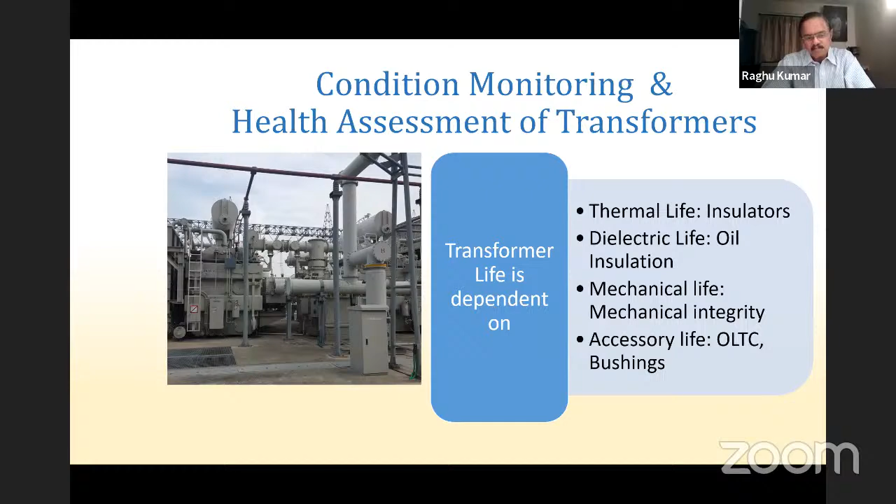This transformer is a failed transformer, and nobody wants to see a transformer in this condition. The windings are being lifted up to understand what went wrong. So now the question is, why is condition monitoring required? Condition monitoring is carried out to prevent failure of critical transformers. And the maintenance has to be made cost effective. You cannot have a very expensive maintenance procedure, so cost effective maintenance is what is required.

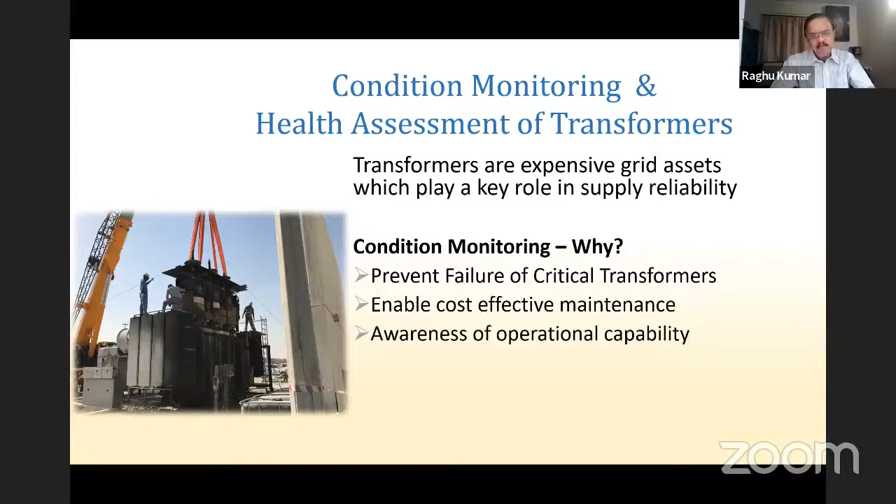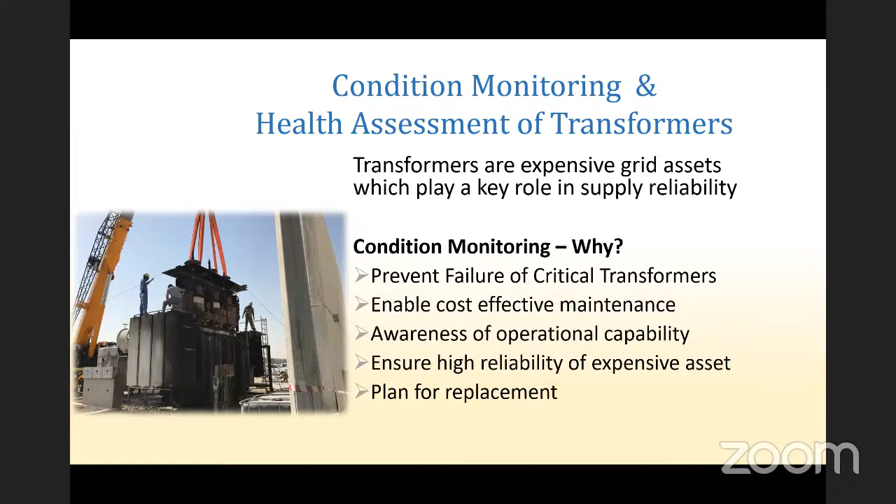Then, awareness of the operational capability. Once you have the complete information of the system, decisions on operation, how much it can be loaded, whether it can be overloaded, can be taken if the present status is well known. Then reliability of an expensive asset is assured by going through condition monitoring. And in the long run, you get enough time to plan for replacement.

Now the question arises, which transformers to monitor? See, Qatar may be having about 900 plus transformers in the system, and it's impossible to monitor. I'm talking about only the transmission side. In the distribution, there are 20,000 plus transformers. In the transmission, we cannot afford to monitor all the 900 transformers.

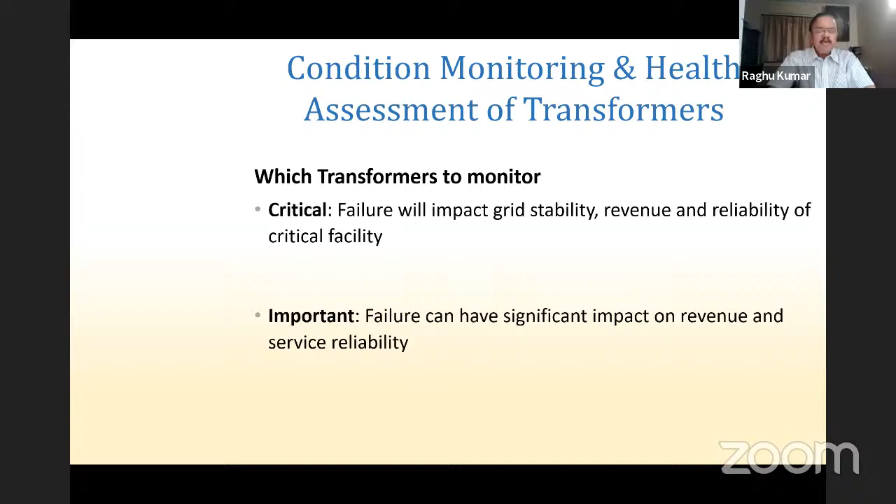So what we are doing is, we are dividing the transformers into 3 different categories. The one is the critical transformers. The failure of the critical transformers can impact grid stability, and it will be a major revenue loss in case of a failure. The second set is important transformers. The failure can have significant impact on the revenue. Normally, these interbus transformers come into this class. Next is the unimportant transformers. The failures are low impact.

So what we were doing is, all transformers which were above 100 MVA were being continuously monitored. And below 100 MVA, transformers were partially monitored. And there are certain below 100 MVA which are fully monitored. Those transformers were the ones which are underground. We had about 12 to 13 underground substations. And all the underground substations are very critical because any fire inside is dangerous. So underground substations are continuously monitored, even if the transformer size is small.

And the smaller transformers are rarely monitored continuously. Only offline condition assessments are being carried out on the smaller ones. To understand things easily, a transformer's life testing can be compared to a person's testing. See, we can do our medical test by taking a blood sample. For the transformer, instead of the blood, the oil sample is taken. The blood sample gives you a general idea about your health conditions. Similarly, a transformer's life can be understood from the analysis of the oil.

Once the oil results are out, the physician diagnoses what is your problem and gives you a certain regimen. A similar role is played by the transformer engineer who does the initial diagnosis, and when the condition is more serious, it is referred to a specialist. Like in your case, from a physician, you move to a specialist. Like that, we move to a transformer expert for advanced diagnosis who confirms the maintenance need. It's like a second opinion.

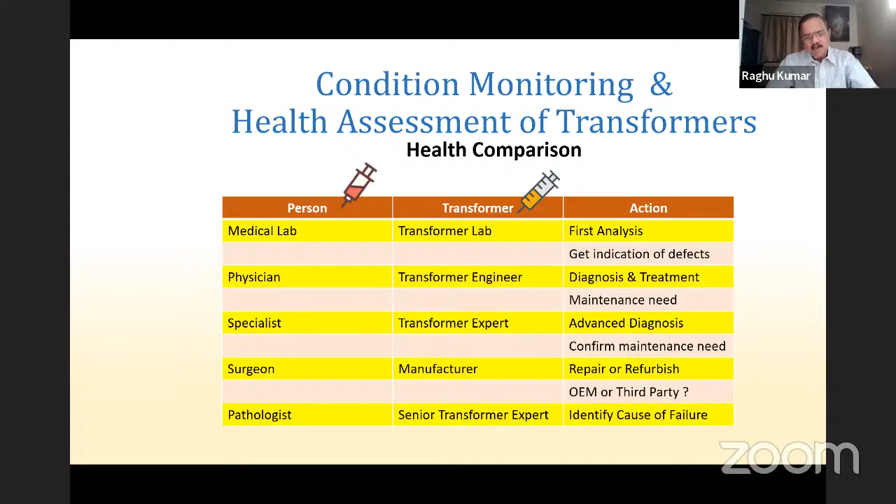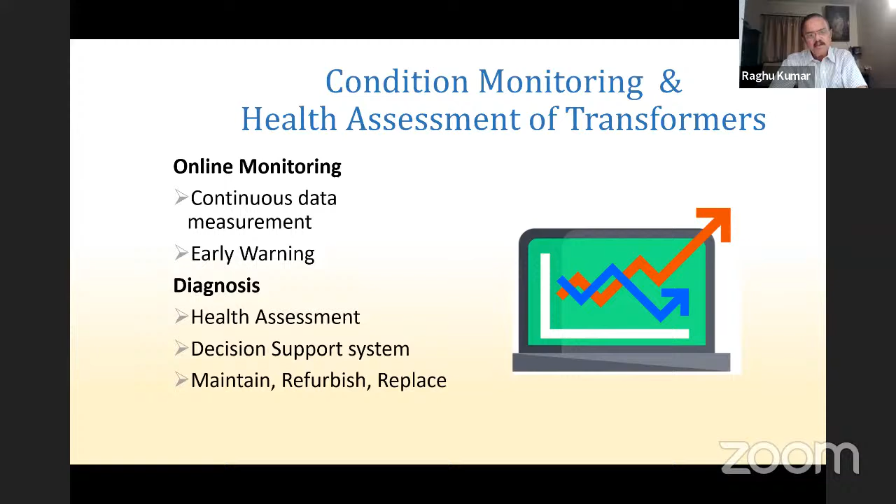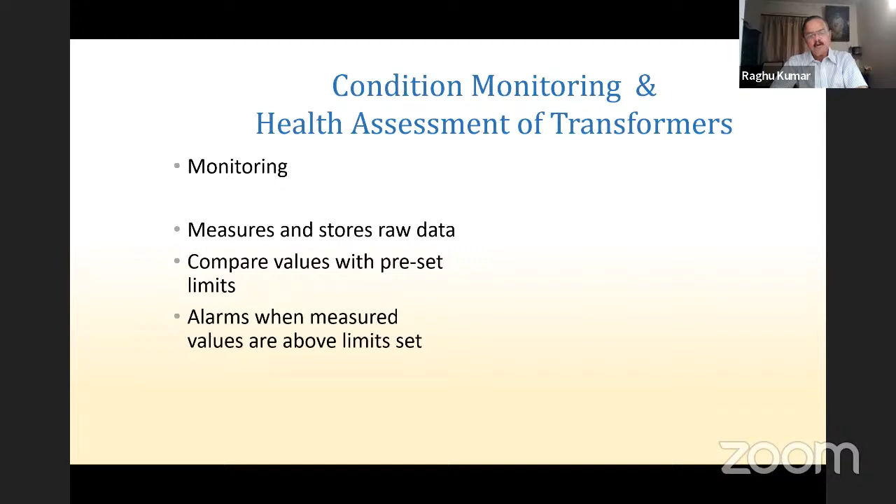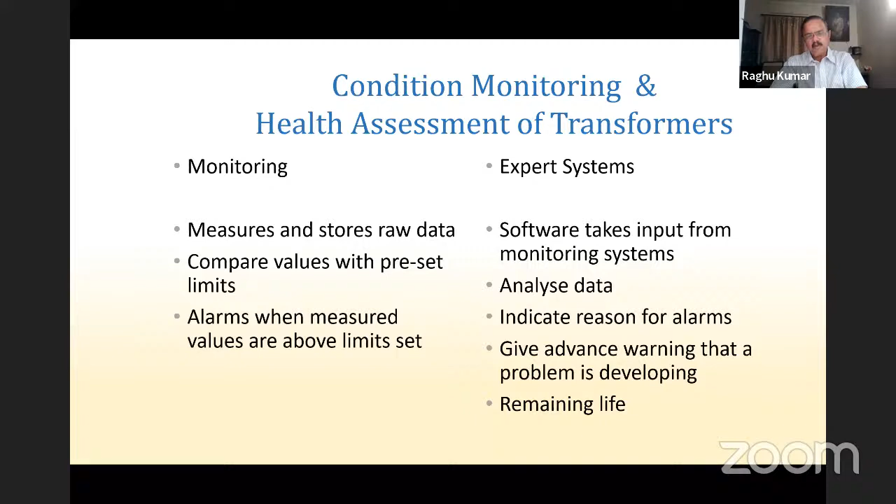So online monitoring is a continuous data measurement. It gives you an early warning system. And diagnosis is the health assessment. It's a decision support system which helps you make maintain, refurbish, or replace decisions. Monitoring basically measures and stores raw data, compares the values with preset limits, and alarms when measured values are above a set limit. In expert systems, software takes the input from the monitoring systems, analyzes this data, indicates reasons for the alarm, gives advance warning that a problem is developing, and the remaining life of the transformer is calculated.

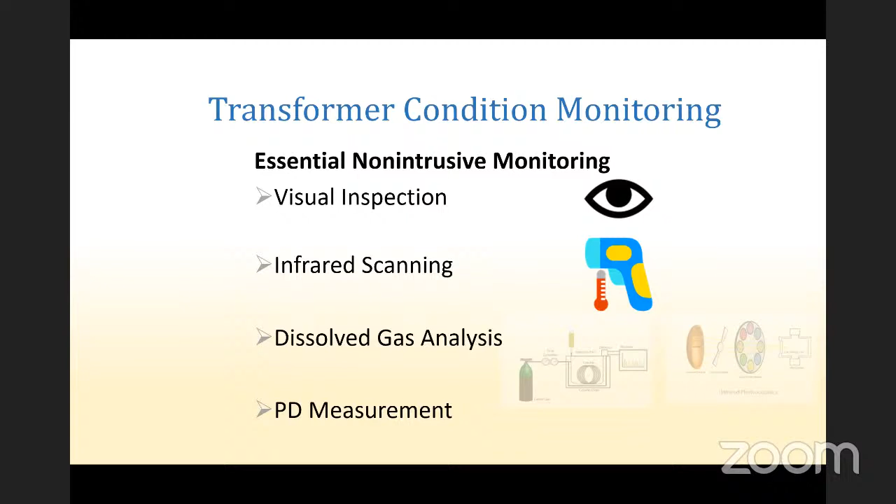What kind of monitoring can we do? Most of the monitoring is non-intrusive while the transformer is still running. The first one is a visual inspection. And the next stage, we go in for an infrared scanning. And the last stage is dissolved gas analysis. And normally, a PD measurement is carried out in certain very important transformers. Visual inspections can find out defects like oil leaks, bird nests, marshalling kiosks, loose connections, etc.

There was one case in Qatar where a visual inspection for oil leaks saved a bushing. It was a 315 MVA transformer, and during the visual inspection, it was noticed that oil was coming out of a bushing's test tap, and the leak was a bit serious. Immediate action was taken, further inspection was carried out, and it was found that the bushing was defective and needed to be replaced.

And this bushing was not an external bushing. This bushing was going inside a GIS. So a failure could have damaged not only the bushing, even the GIS compartment could have been damaged, and it would have been a major disaster, and it would have taken more than a year to repair and replace. Just because the visual inspection identified the problem, immediate action could be taken. The bushing was replaced, and the transformer was brought back into service.

Next is this, which looks like a minor issue, like a bird nest. No, it's not a minor issue. See what happens with open bushing transformers. This bird nest comes up, and then the bird is not the problem. There are cats coming looking for these birds. The cats jump over the transformer and cause a direct short circuit. And this has also caused tripping of the transformers.

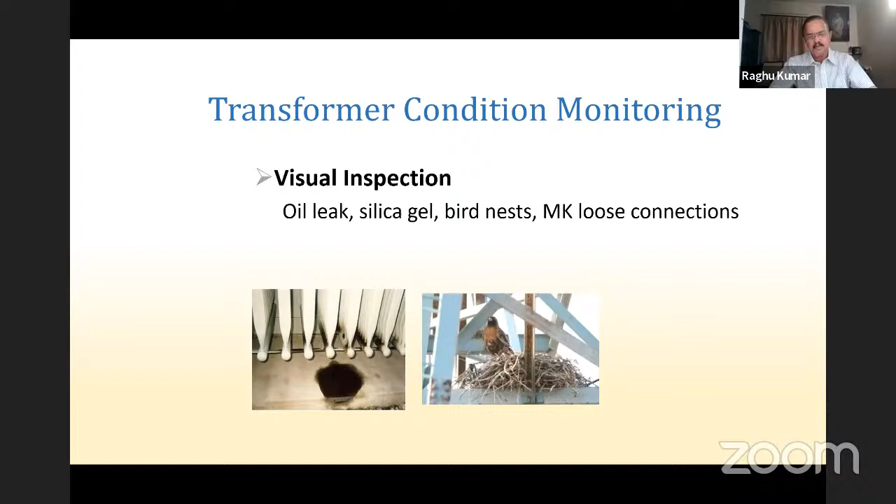Next comes infrared scanning. In infrared scanning, thermal images are taken using an infrared camera. This is normally done during peak load times. Normally in the Middle East, summer is the peak load.

This identifies cooler defects. It has been detected after years that certain coolers were not opened, which affects the cooling efficiency. This can be detected only in thermal imaging. And certain other hotspot issues also can be identified with this infrared scan.

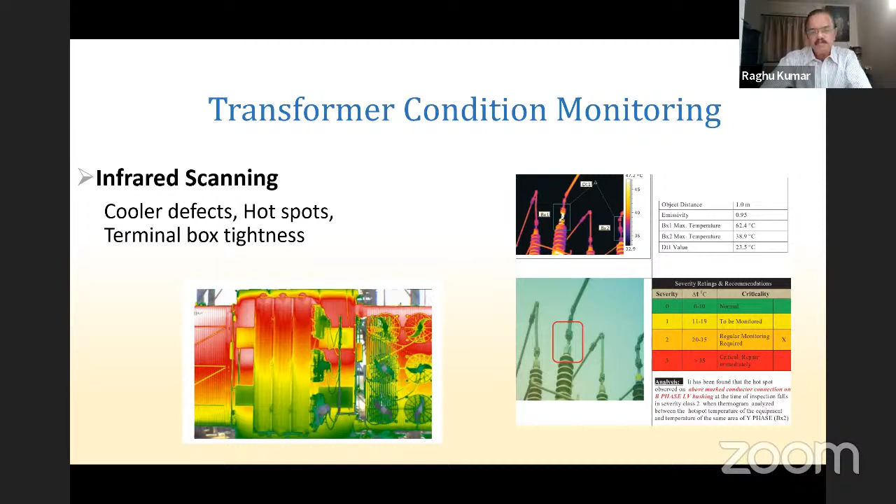If it is between 20 to 35 degrees, then the monitoring frequency is increased. If it is greater than 35 degrees, immediate action is required, and shutdown is arranged and checked. Most of the times, it has been found that a loose connection was the reason for the overheating. So these are the infrared scanning cases.

Next comes online monitoring. This is an 800 MVA transformer where you can physically see certain things. This is the online monitoring device, and this is a monitoring system where all the data from all other sources comes for monitoring. This information is taken inside the control room to an HMI, and that HMI has got the software for all the analysis purposes.

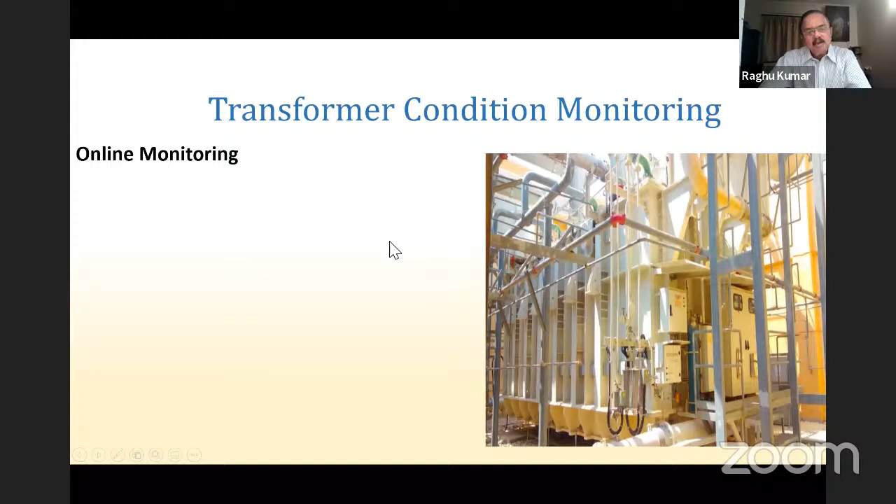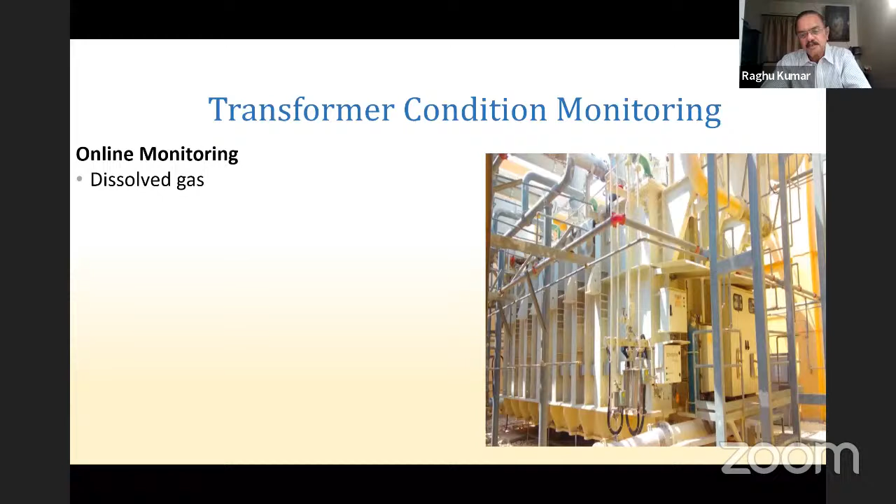What is being monitored is dissolved gases. There is a decision you have to take whether you want to monitor 1 gas, 3 gas, 5 gas, or 9 gases. In this particular transformer, 9 gases are monitored. Humidity of oil, oil temperature, current and voltage are recorded. Bushing tap PDs are measured continuously. Tap changer positions are recorded.

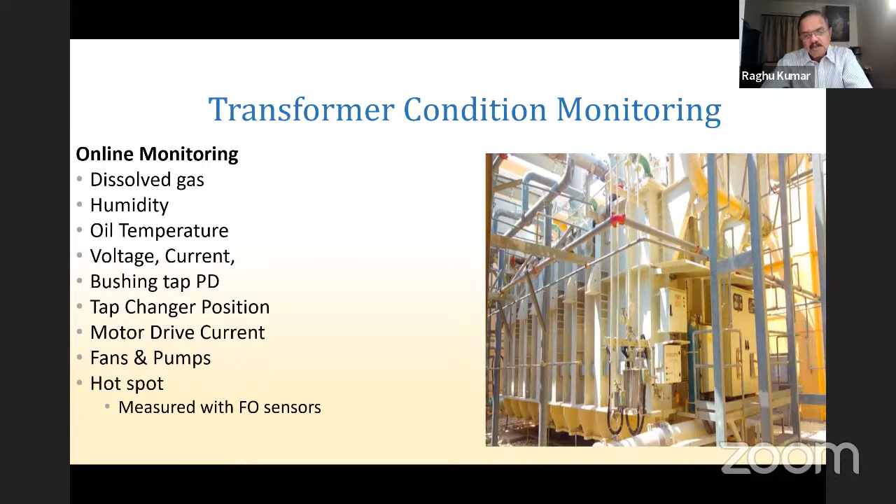Tap changer motor drive currents are recorded. Fans and pump status are recorded. And hotspots: there are two ways of finding out the hotspot. One is theoretical calculation. Second is physical sensors kept inside the transformer. Fiber optic sensors are kept inside the transformers. From this, direct hotspot temperatures are measured. So these are the basic online monitoring systems.

These are some of the equipment used for online monitoring. This Kelman Transfix works on the photoacoustic principle. And Serveron works on gas chromatography. Gas chromatography has a maintenance issue in the sense that it needs a carrier gas. Helium is the carrier gas here, and this helium needs to be replaced every 2 to 3 years. And once you replace it, calibration is required.

This equipment does not require any calibration. It works on a photoacoustic analyzer, and there is no carrier gas involved. Both of these can check 9 gases. In smaller transformers, we fix these hydrogen sensors. This can monitor only hydrogen and moisture. Most of the faults have hydrogen in them.

And this is how the oil is taken into the analyzer. See, from the top valve, oil is taken and then it comes into the analyzer. Once this process is over, it is pumped back to the bottom valve. So no oil is lost during the analysis process.

The fault intensity is dependent on the total amount of combustible gases. Moreover, this process is a trending analysis: over a period of time, what is the rate of change of gases?

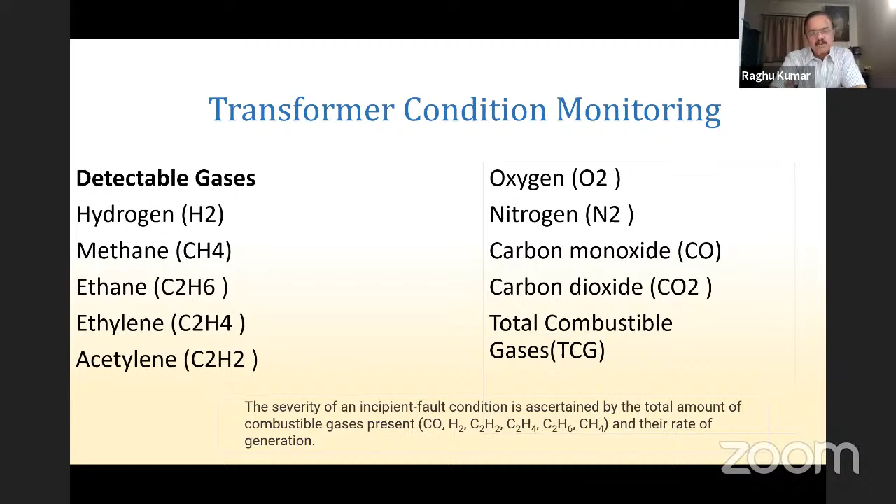This is a practical example of monitoring success. This was a 150 MVA transformer, and it was giving Buchholz alarms. The gas was not sufficient to trip, but it was creating Buchholz alarms. If you reduced the load, the alarm disappeared. This was a very important transformer and we couldn't switch it off immediately.

So continuous monitoring of the gases was done for a period of 1 week. This particular transformer did not have condition monitoring at that point of time, and physical oil samples were taken and checked every day. At different loads, the load was reduced and increased and checked. And finally, we arrived at a conclusion.

See, if you look at this, this is the most important gas, which was above the warning limits. This is ethylene. Ethylene is normally present when there is a high temperature fault, like faults above 700 degrees.

Later on, over a period of time, it was assessed and found out that at 60 MVA the transformer can be safely operated. And we kept that load at 60 MVA, and the transformer was operated until an expert arrived from the manufacturer. And then an internal inspection was carried out. Those days, internal inspection means you have to remove oil completely. Then one person goes inside the transformer, physically checks, comes out, and then finds a solution.

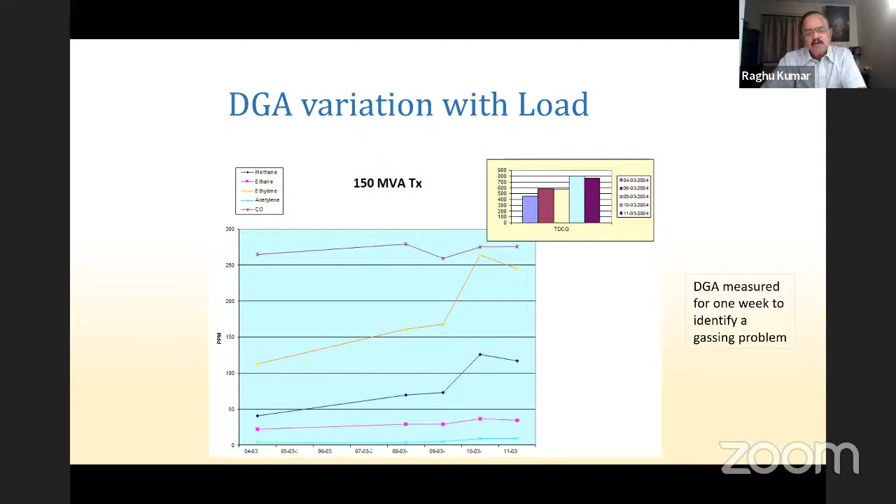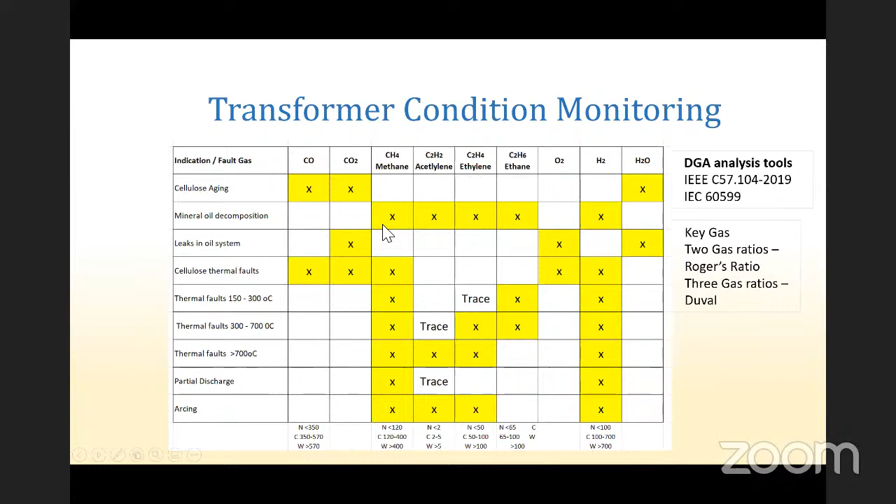And DGA gives out different gases. And it is very difficult to say what the fault is just from the gases only. If you look here, you can see hydrogen is present in most of the faults. And similarly, methane is also present everywhere. So the answer to what the fault is, you have to get it from an expert. And there are certain softwares which can give you the results.

And there are certain normal values given in IEEE standards, where, for example, if you take hydrogen, 100 ppm is a normal value, 100 to 700 range is a caution value, and above 700 is warning. But IEEE is very, very conservative. So this 100 is not always very practical. It is load dependent. In summer, the hydrogen level increases, in winter it comes down. So we used to keep up to 200, 250 as normal, and then in winter it will definitely come down.

And how to find out what the fault is? IEEE and IEC have relevant standards, which give you some kind of tools to find it out. There are three methods basically used. One is called the key gas method, where only a single gas concentration is considered for fault finding. Like in the previous case which I showed you, ethylene. Ethylene concentration shows that it is going to be a high temperature fault. Acetylene shows it is an arcing fault. Things like that are identified from a key gas.

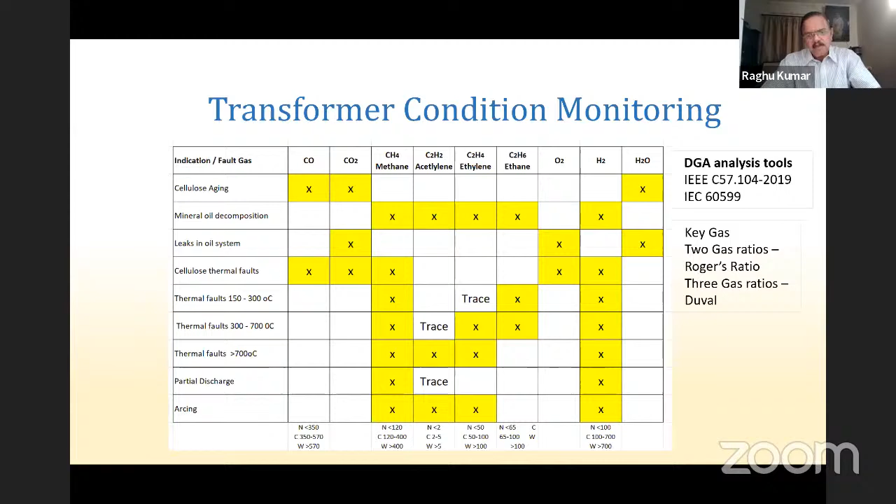Then there is another one called a two gas ratio, which is called the Rogers ratio method. The third method, which is most popular, is a three gas ratio method called the Duval triangle. This is the Duval triangle, and this is the person who developed this system. He is Dr. Michel Duval. He was working for Hydro-Quebec, and he travels around the world and trains people. We all received our initial training from him. He used to come and explain things, and he is an expert in the oil system.

In the Duval triangle, he has given a triangle with three gases: methane, ethylene, and acetylene. Percentages are calculated on a three coordinate basis, and where the three coordinates meet at some point in this triangle, that is the fault. These faults are given D1, D2, DT, T3; all these things are explained here. So suppose it meets at D2, it means it's a high energy discharge. And if it is meeting at this point, it's a partial discharge, like that.

There is one disadvantage for this method. You have to be initially sure there is a fault present. Otherwise, the Duval triangle does not have a location which says no fault. Every point in this triangle is a fault. So you have to be initially sure that there is a fault present to use the Duval triangle.

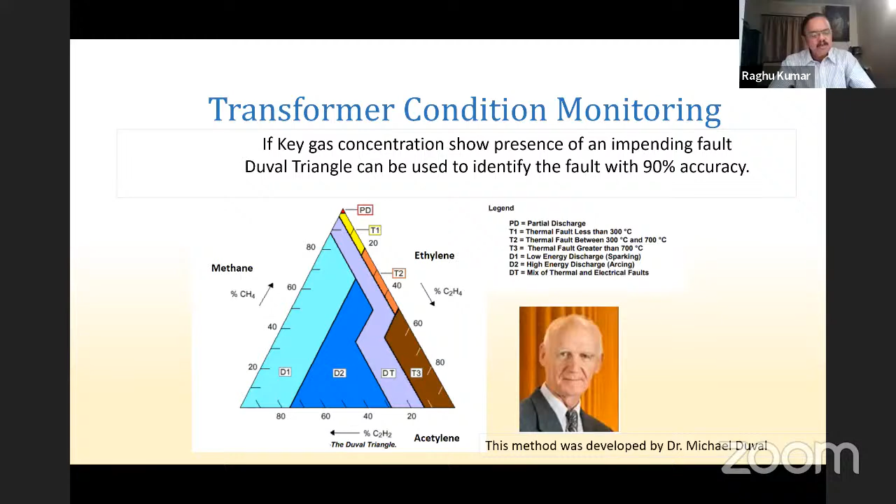Next, we do some kind of offline monitoring. Offline analysis is required to find out physical conditions of the oil, like acidity, moisture, interfacial tension, breakdown voltage, inhibitor content, oxidation stability, corrosive sulfur, degree of polymerization, furfural, PCB, etc. Each is a huge subject. Like corrosive sulfur is a big issue.

It was created by a substance called DBDS in the late 90s, early 2000s, when the transformer requirement was very high, and the oil was passivated with DBDS, which started giving problems of copper sulfide formation. And there were sudden transformer failures. On investigation, it was found that DBDS was the culprit. Nowadays, each transformer oil is tested to avoid this corrosive sulfur. Then color, viscosity, flash point, etc. And DGA is again rechecked offline to confirm the online measurement is correct.

See, color is something which you can easily identify with. See, these are samples of oil with different colors from good to bad. The good oil will look like that, and the worst oil is looking like this. Why this oil color changes is due to sludge formation. And once the sludge is there, the cooling efficiency is reduced drastically.

How do you reclaim the oil? The oil can be filtered, yes. Filtering can remove the gases in that, and the moisture can be removed. IFT can be improved, BDV can be improved, but it cannot change the color and it cannot change the acidity. These two cannot be reversed by oil filtering. So what is the solution? There are two solutions. One is you replace the oil completely. The second is called oil regeneration.

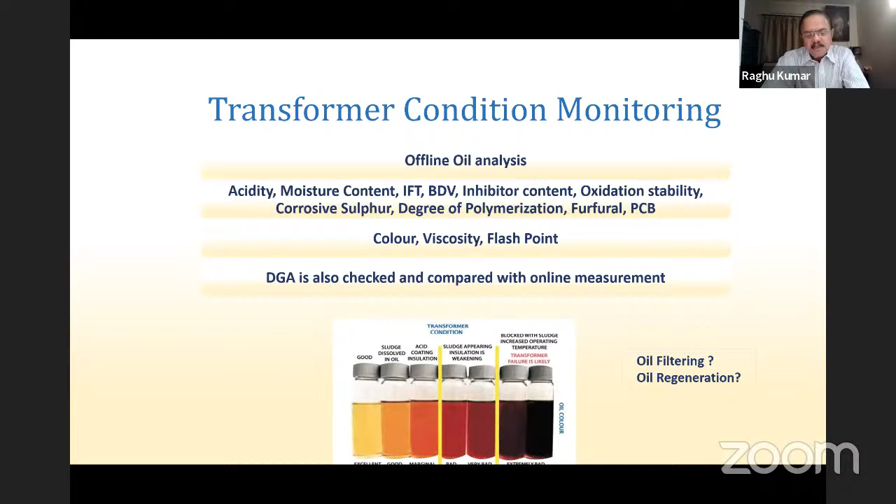This is an example of an oil regeneration. Oil regeneration can be achieved at almost half the cost of a new oil. The equipment comes in a container, and this container has got two compartments. One compartment is where the oil reclamation process takes place, and the second one is a laboratory setup where the oil can be continuously tested. This is a two-part process. One is oil filtering, and the second is it is passed through columns of fuller's earth. And this is what is removing the acidity, sludge, and stuff like that.

These are the set of oil samples which have been taken during the process. You can see the change in colors. This was the initial oil color, and this is the final oil color. The advantage of this one is the whole process is carried out while the transformer is live. We switch it off only one time for connecting the hoses and the second time for removing the hoses. And the oil circulation is going on continuously on a live transformer. And there are certain equipments which are connected to the inlet and outlet to avoid entry of air into the transformer.

And this is fast also. These are huge machines with a capacity of over 5,000 liters per hour. And on a small transformer, hardly 20,000 liters of oil will be there. Within one day, the process will be over. The same oil, if you want to totally replace, it's a one-week job. And it's not a question of job alone. This oil which is removed, disposal is a big issue because of environmental factors. Oil regeneration avoids all this.

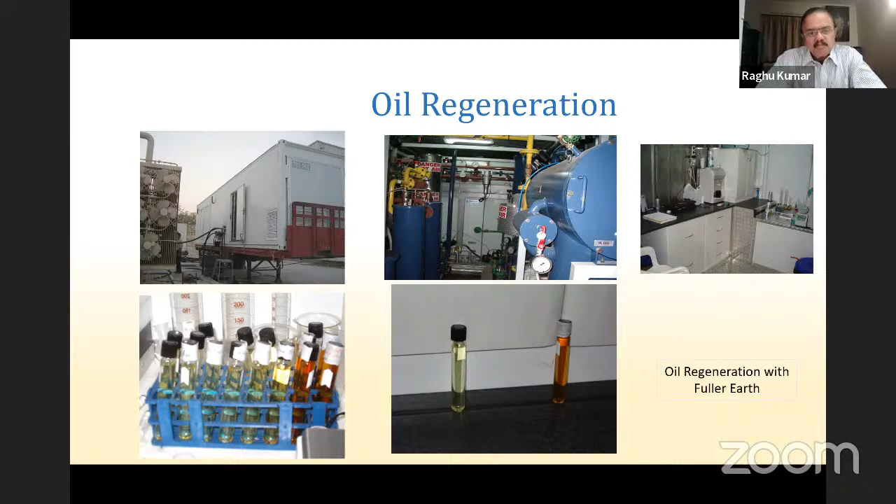This is an interesting part. The internal inspection. See, suppose you have identified a fault in the condition monitoring, and you know it is inside the transformer. How do you solve the problem? Normally the OEM has to solve the issue, but the problem is we don't know exactly what the problem is internally. The two ways of solving the problem: one is giving a contract directly without knowing what the issue is, where the contract value will be very high because the tenderer doesn't know what exactly the problem is. He is expecting the worst and will charge you heavily.

The second is a two-part contract. The first part is an internal inspection, and based on the internal inspection, we go in for the second contract. With government utilities, you know the difficulties of getting contracts through. The first contract may take a year, the second contract may take another year. So for 2 years, your transformer is lost. Now, ABB has come out with a new technology. ABB has been taken over by Hitachi, I think. Now it's called Hitachi ABB.

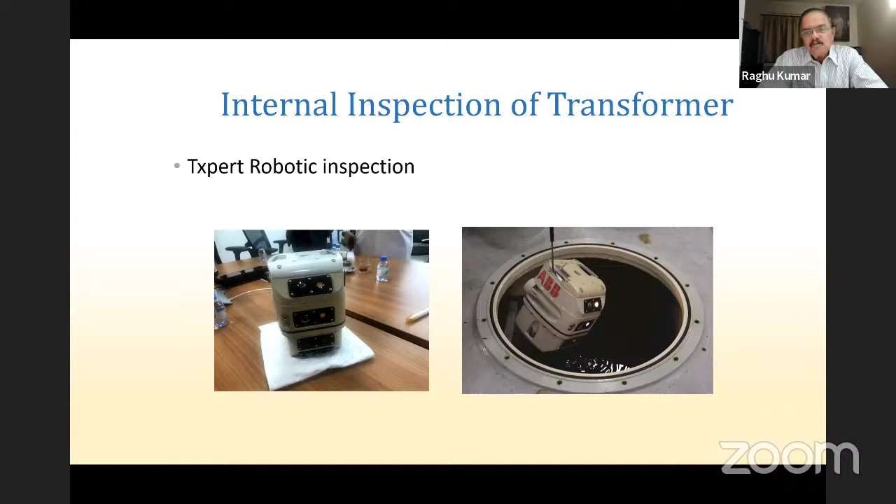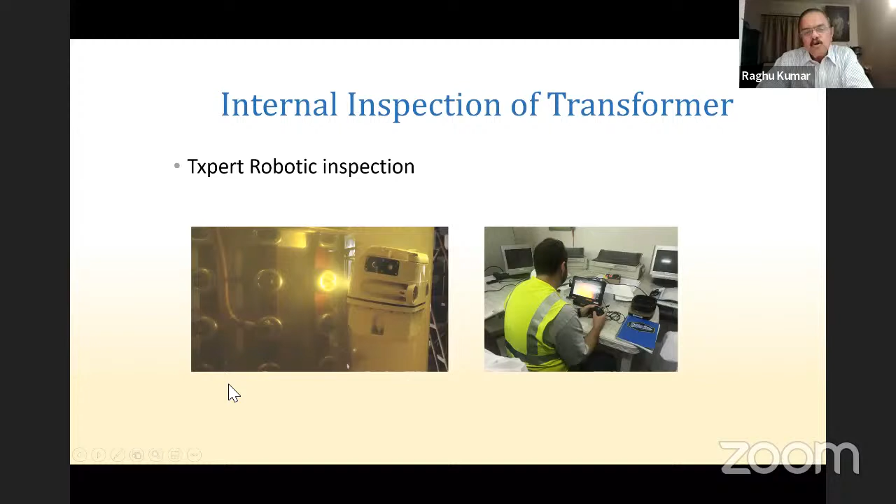Next, we move on to condition-based monitoring. Before condition-based monitoring, let us see what are the types of maintenance. One is called corrective maintenance, where the repair is only after failure. Preventive maintenance is an old system where time-based maintenance was carried out. Fixed time-based things were maintained.

The issue was we were overdoing it. Maintenance was being carried out without knowing what was the internal condition. It was just a routine maintenance. Then came in condition-based maintenance. The advantage is you have the condition monitoring in place and you have all the results available, and you attend only problems where the condition monitoring has told us, yes, there is some fault which is developing.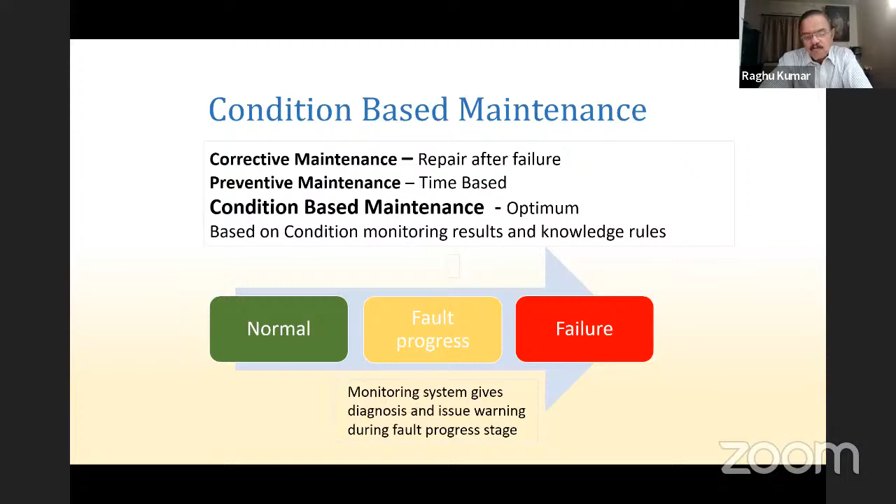So these are the three stages for a normal transformer. It moves from a normal stage to a fault progress stage to failure. We have to catch it in this fault progress stage. Monitoring catches it in the fault progress stage, which is explained in this PF interval graph. It's potential failure to functional failure.

In the first stage, here the transformer is healthy, and then it starts developing a problem somewhere here. And it starts giving you leading indicators. It is like your pre-diabetic stage. You are not diabetic, but you have started getting symptoms that you are going to be. And then this is the point where the potential failure starts.

Later on, you get a higher level of signals. So you have to catch this period. Within this time, the maintenance has to be carried out. If you don't do anything, it will lead to a failure at this point of time. So this is the principle of condition-based maintenance.

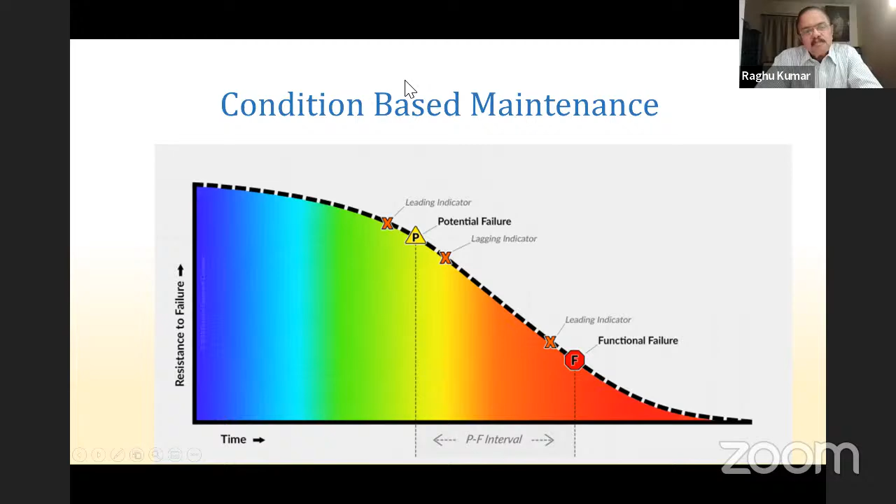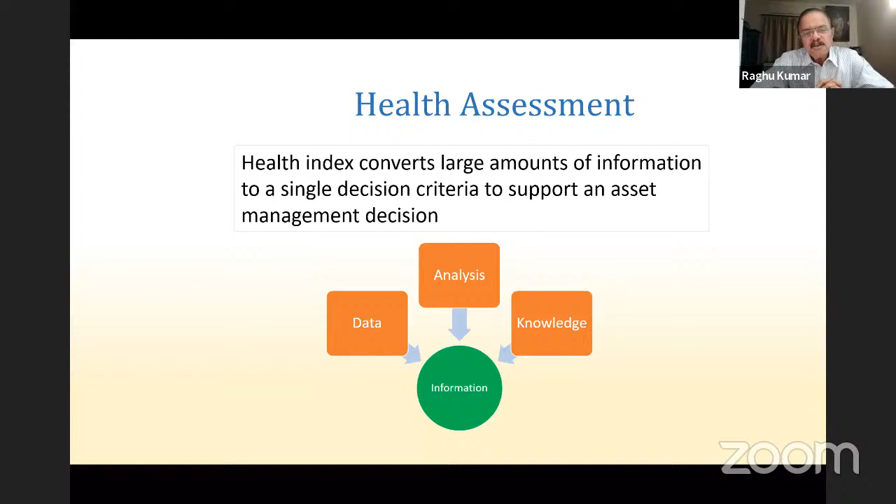So based on condition-based maintenance, we are able to get a lot of information. It's raw data which is available in condition monitoring, which is of no value unless it is analyzed. So this data is analyzed and knowledge is also introduced into the algorithms. And finally, we get it as information which is useful for the management.

The condition monitoring finally gives you an asset health index. It's a score. Basically, asset reliability and remaining life is given in this score. There are two ways of doing it. One is a color combination. The second is a 1, 2, 3, 4, 5 numbering system. Both are used. Then the asset health index is computed. This asset health index, as I told you, uses either numbers or colors. This is for the senior management level.

And for the maintenance people, the asset maintenance index is very important. The whole area was divided into multiple zones, and this index tells you, for a particular zone, what is the maintenance requirement of those transformers. It is prioritized: which transformer is worse, which is in good condition, which need to be attended as early as possible. These scores are available in the asset maintenance index.

And this asset health index is taken from condition monitoring data, offline test data, historical data, and internal inspections, if any, carried out. Finally, this health dashboard is the one which is useful for the top management and the senior level management. Here, in one single picture, you get fleet information of the total transformer health. And whenever the maintenance people want a budget for a major repair, this health dashboard is a supporting document. It's a decision support system.

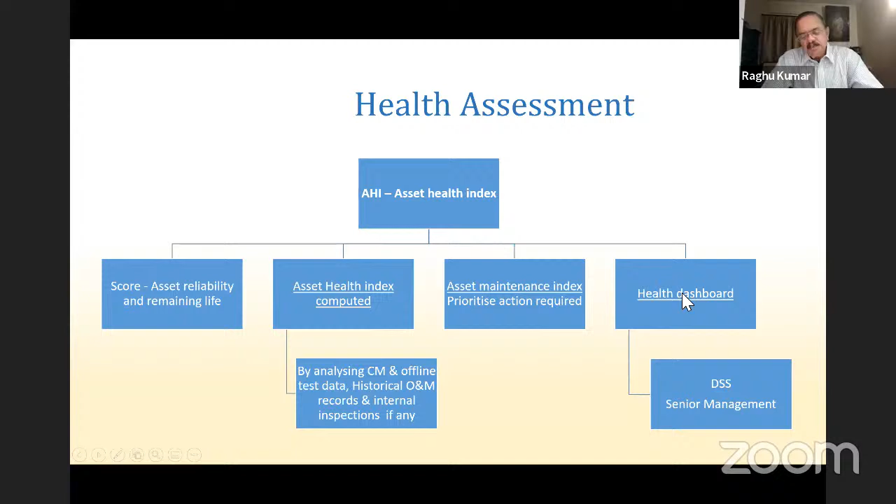This is how this health assessment is calculated. Multiple data are available from the condition monitoring, like your temperature data, your oil data, your loading information, your tripping information. These data give you a health indicator. And then offline data are there, like electrical tests which are conducted, oil analysis which has been done separately, visual inspections, thermal imaging. All these offline data are also put in.

Then there are expert opinions. There is a certain knowledge base available worldwide. And this knowledge base experience is also put into this algorithm. And certain weightages are given for each indicator. And finally, we get a color chart like this. This chart gives you the good, fair, satisfactory, poor picture.

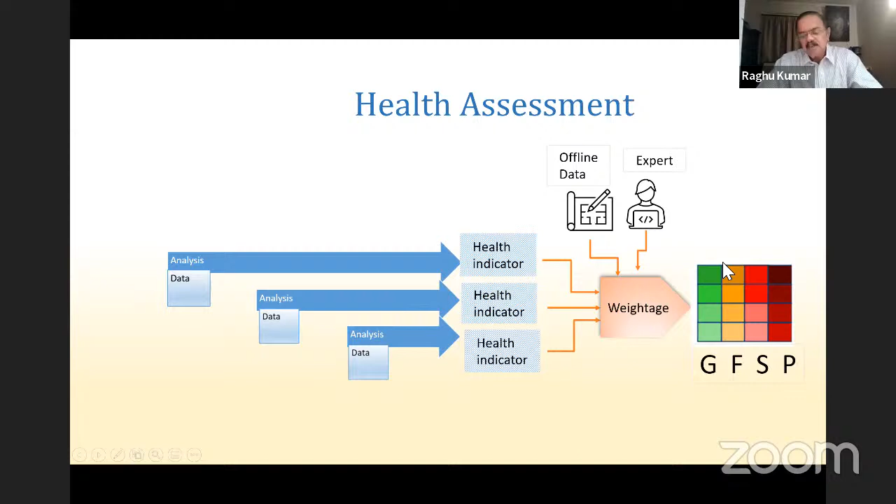And what you see on the rightmost top are the most dangerous ones, which can fail at any moment. So you get enough time to think whether to replace them or not. These transformers are not attended. Only these transformers are attended initially. And if there are sufficient resources available, then this level of transformers are attended. This is how health assessment is utilized.

Transformer lifetime calculation. See, data analysis is from the historical records: loading, maintenance data, failure data are all taken from the historical data. Then condition assessment data is for present status. The present status is taken from scanning, online and offline diagnostics. All this information is taken from the condition data.

And the remaining life assessment is carried out by loading guide, which is available in IEEE standards, and also furfural analysis. This gives you the quality of the paper. The DP value of the paper in a good transformer will be over 1000. And if it falls below 200, the transformer is about to fail any time. Then certain trend analysis and O&M practices give you the remaining life calculation.

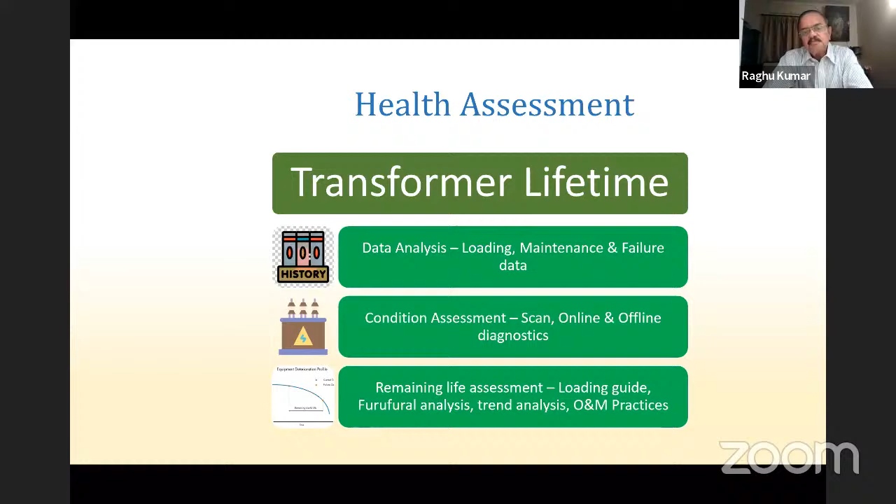We move on to the health dashboard. This is the most important document which we get from the health assessment. Here, if you see, this one is superimposed on Google Earth. The location of the transformers is superimposed here. And then this is the fleet information. In the fleet information, here you can see multiple colors and some numbers are also there.

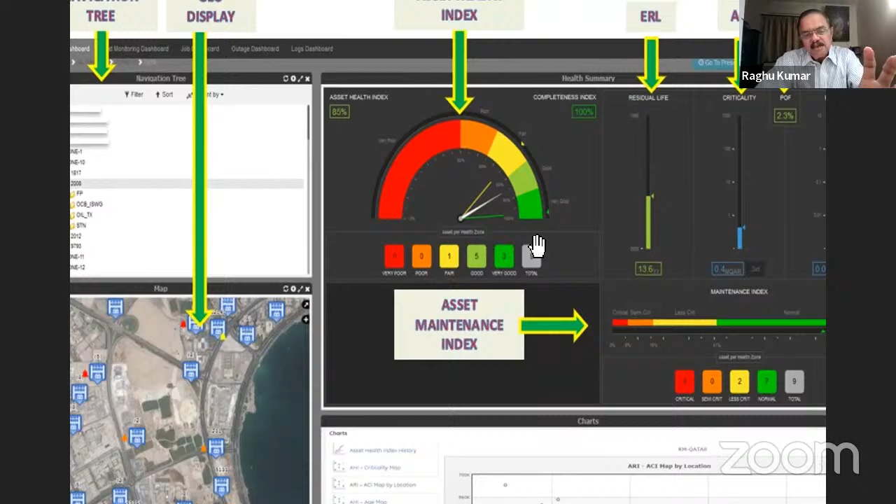So many transformers are good and so many are bad. So it's fleet level information so that management knows you have so many good transformers, so many bad transformers which need to be attended. And this asset maintenance index is for people who are doing the actual maintenance. Here we give for a particular zone how many transformers need to be attended as early as possible. Information is coming out from this.

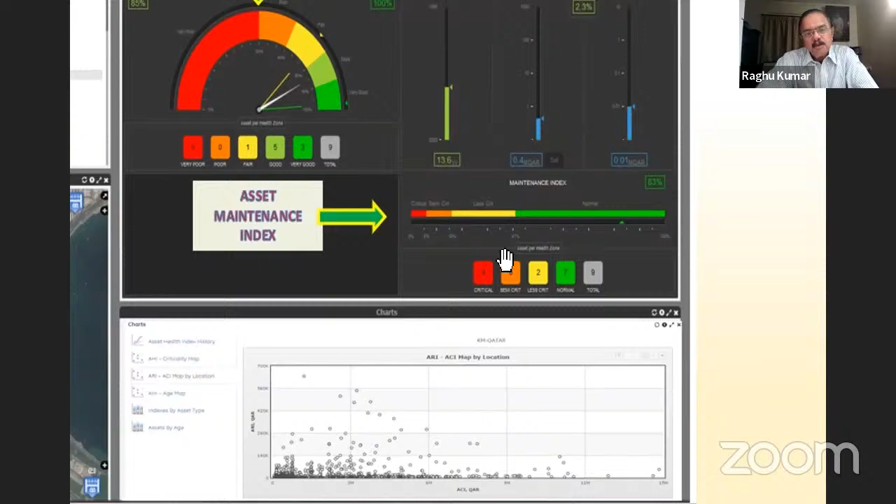Additional information you get is the expected remaining residual life. In this particular case, it says the transformer will live 13 years more. Then there is something called an asset criticality index. This is a calculation based on a lot of factors like how important the transformer is, how critical the loads are. There are certain formulas for calculating this asset criticality index. And next, probability of failure is calculated. Then the asset criticality index and probability of failure give you the asset risk index.

So this is the information which goes to the top management and to the decision support systems. And decisions like whether you should replace, repair, or upgrade the transformer are all taken based on the health assessment data. The benefit of health assessment is it's a decision support system, as I told you, and it can set the maintenance policy, whether you want to do corrective maintenance for low profile transformers, preventive maintenance or predictive maintenance. Predictive maintenance is what is done under condition-based maintenance. Then replacement policies are decided, which transformer to replace, when to replace. Lifetime extension, uprating and upgrading requirements are done.

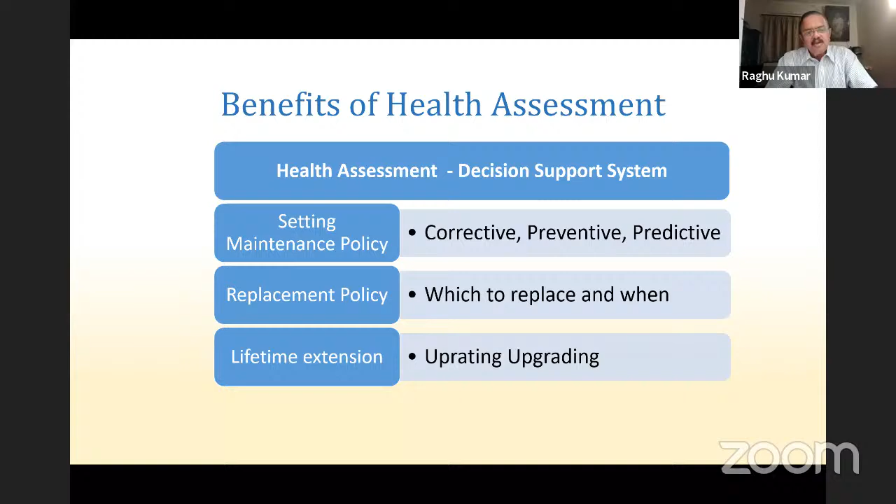The advantage of health assessment is a cost-effective improvement of system reliability. System reliability is also dependent on the design factors. As far as Qatar is concerned, 400 kV systems are N-2. That is, even if 2 assets fail, the system will still be stable. Below 400 kV, it is all N-1. One asset fails, the system can survive. So that design factor is also very important.

And I said effective utilization of resources, because in the present day, the staff is very, very less compared to olden days. Between 2000 and 2005, the staff strength was reduced to 1/3. And the utility increased their number of substations from maybe about 120 substations to nearly 370 substations at 1/3 the staff. So effective utilization of resources, prioritization of maintenance, performing maintenance at the right time. And we reduce the forced outages and fault trippings.

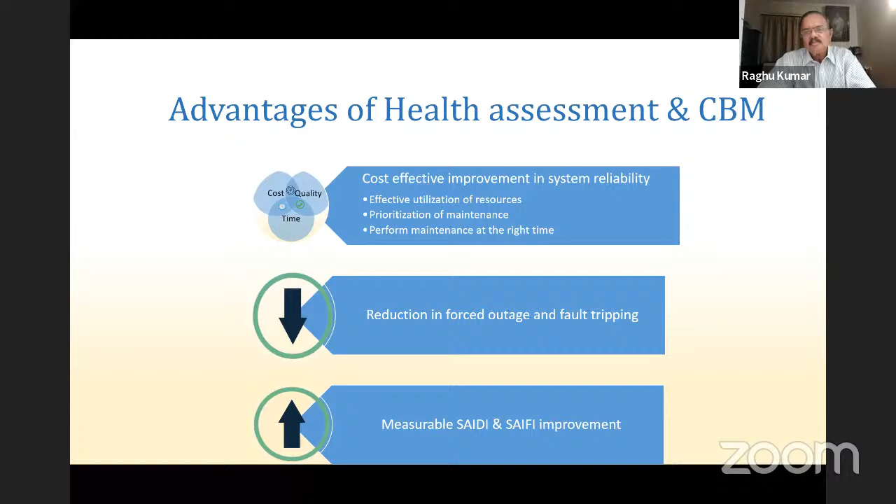This can be measured using the reliability indexes like SAIDI and SAIFI, which are normally used in all utilities; one is a frequency index, one is a duration index. These will be reduced with condition assessment and condition-based maintenance. Thank you. This is the basic information. And whatever I know, I can answer if you have any questions.